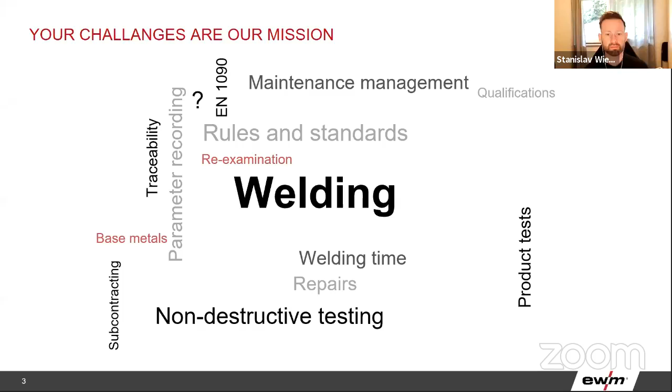And this leads me to the next point, that welding is not that simple anymore like it was 10 or 20 years before. Because if you started to weld 20 years before, you had maybe some documents that you needed to fulfill. You have some norms that you need to fulfill, and you need to document those norms and standards. And if you have done this, then everything is fine. So somebody's ordering a product and you're just welding that product, and then you're just delivering that product. And that's basically it. And I have talked with a lot of managers from productions, and most of them told me the same story.

They said, when we have done the products 10 years before, and most of the industry products, like, for example, heavy industry, like bridges, they haven't changed. The technology of bridges hasn't changed in the last 10 years. So for the last 10 years, we are building the same constructions in bridges. We are welding with the same materials, with the same wires, and mostly with the same welding machines even, because the welding machines are not breaking down. So the machine is even the same that was used 10 years ago.

And that brings me to the point that the work hasn't changed in the last 10 years on bridges, especially in that example. And the end product is mostly the same from the technology, from the materials, from everything that was put inside that product. But what has changed is the quantity of the recordings, of the documentation. And these managers spoke about 8 times more documentation than 10 years before. So that means that you do exactly the same things with exactly the same machines, exactly the same wires and gases. But now the request is that you have to document more and more.

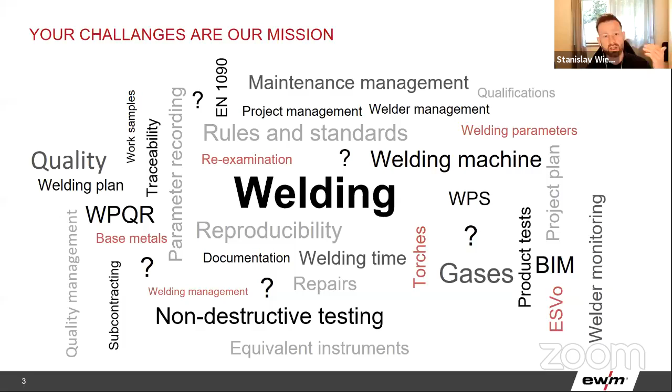And there are a lot of wordings that are now linked to welding. So if you start welding, it's not only welding anymore. With welding, you have a big responsibility. You need to make sure that the welding time is correct, that the documentation is correct. You have WPSs, welding machines, rules and standards, quality, welding plan, and so on. And therefore, we have created a kind of quality circle of welding, if you want. So Welding 4.0 in welding production, we want to summarize it in that slide.

So you have component information that you need to collect. How many welds are inside that component? What kind of weld preparation is inside that component? How many times do we need to weld that component? Then we have the welding equipment. So we need to choose the right welding equipment. In between the welding equipment and the process, we have predictive maintenance. So do we weld until the welding process breaks down because of the torch? Maybe the torch is very old, the torch is damaged, the contact tip is damaged, whatever.

And then the process breaks down and I need to maintain the welding machine before I restart the process. Problem is that I then maybe have an error in my welding because I have just stopped during the welding. So predictive maintenance is a big point.

How can I do predictive maintenance without any tools? Can I say, okay, I will change the contact tips every morning on every torch just to have predictive maintenance? Or is there any simple solution that gives me a light or a noise and says, hey, you have welded now for 10 hours, change the contact tip?

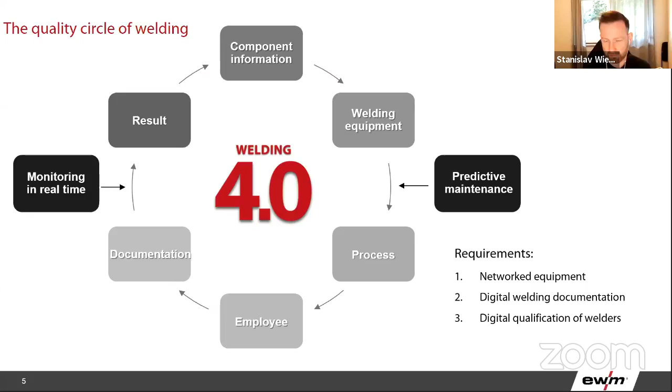And of course, we need to have digital qualification of the welders also. So we have a lot of paperwork to do. And here I'm coming to the benefit of real-time monitoring. So we have just talked about real-time monitoring. How can we do that? And what is the benefit out of it?

Because a lot of people are asking me, hey, why should I record welding data? Why should I record parameters? And what is the reason for that? I can just let them weld. I don't need to record anything. Why should I do that? Because if I record welding parameters, then I'm overwatching my personnel, and they don't want that.

And overwatching the personnel is a thing that we have been doing already for many years. And we are not overwatching personnel to criticize them and to say, okay, your work was bad, or you have welded too few hours in the day, or whatever.

For example, I am in the sales department, and I am tracking my daily work every day. So I'm tracking every meeting. I'm doing protocols of the meeting. My boss knows where I'm going. My boss knows where I am today. And I want him to know what I'm doing, because I want my boss to see how good my work is.

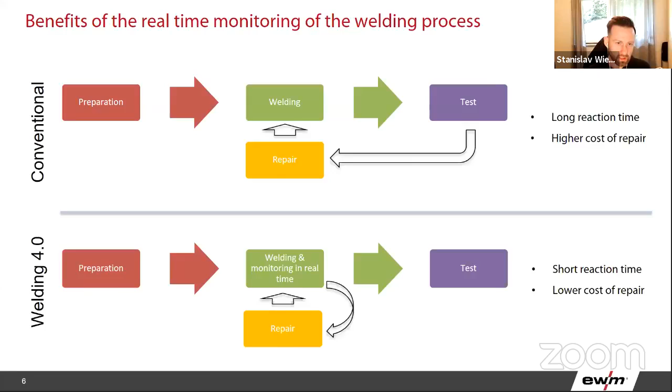And if you look on the side of the predictive maintenance with, for example, contact tips or torches or wire feeding units, in the conventional welding, you have the situation that you weld, then it starts to go down with the quality of the torch, for example, or the contact tip, some working products like the torch, like the wire feeding unit, like the rollers on the wire feeding unit. So it's going down with the quality, and at one point it just is broken.

And then your quality is just going down, because at that point, if you just stop the arc and maybe the wire is sticking inside your molten pool, then you need to repair, you need to grind, you need to cut, you need to change the torch, and so on. So that means that during the time the quality is going down, you're still welding. So your quality on welding is decreasing, and it's decreasing till it collapses. And when it collapsed, then you have to maintain.

So the maintenance is coming very unexpectedly. And then you need time to bring some contact tips, maybe bring some new rolls, cut the wire, maybe the torch is broken, you need a completely new torch, and so on. In Welding 4.0, the idea is that the machine is giving you information about the time you welded already. So you have, again, the possibility to react.

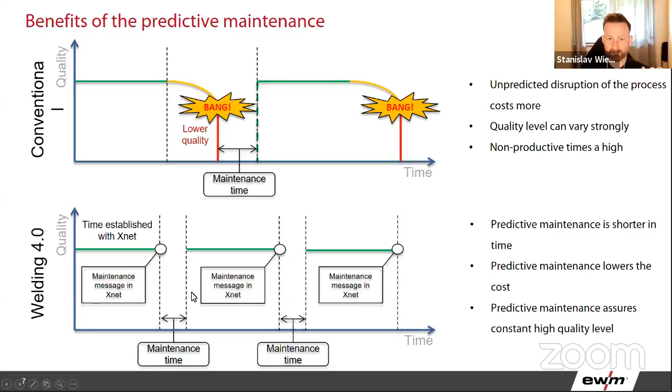It doesn't mean that you need to react or you have to do it every 2 hours or something. The time you can set by yourself. So it's your experience, what is necessary to set a correct timing. And with this correct timing, you can keep your quality on the highest level and shorten your maintenance time. And we need to do it in four simple steps.

And I don't want to scare you, but this was a shocking moment in 2019, where the rooftop on a stadium in the Netherlands was just dropping because of wind. And it was a playing day, so it was a Sunday. Sunday normally we are playing soccer, and the good news was that the organizer of that game said, okay, it's too windy, we cannot play today. It doesn't make any sense, because when we kick the ball, it's just flying around because it's so windy, we cannot play.

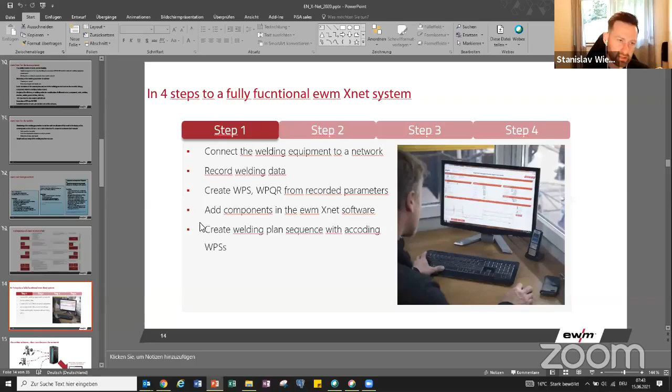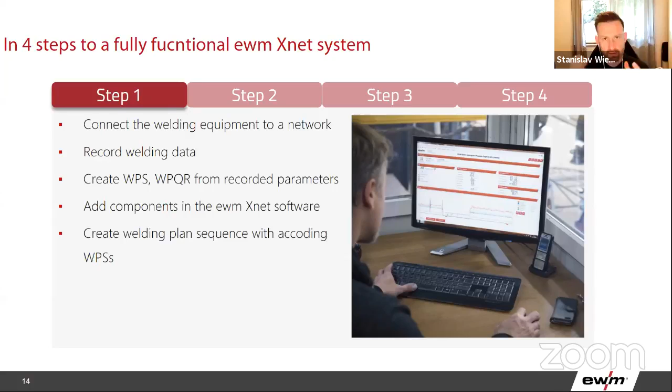So this is a big point for Industry 4.0, or Welding 4.0, to make sure that you are recording your welding data and can link them to a certain project, or can link them to one piece of metal. And it's working very simple. So everybody of you, I think, has a server, and you just need a server to install that kind of product, to install XNet on that server.

And you can link every welding machine from EWM by using Wi-Fi or even Ethernet with a piece of gateway. So it's kind of external gateway that is collecting information from the welding machine and sending it over to the server, and the other way around, if the server is communicating with the welding machine and sending it back to the welding machine. And of course, you can use equipment like an adapter for alien machines.

So if you use not EWM machines, okay, because the main idea of Industry 4.0 is connect everything inside your production, and you don't need to change on one fabricator. Even if I would be happy if you just use EWM, of course, but if you don't use EWM, you can equip your welding equipment or welding machines with an adapter and use them also in XNet. And you can then access, of course, from every browser and every device, iOS, Apple, Windows, whatever.

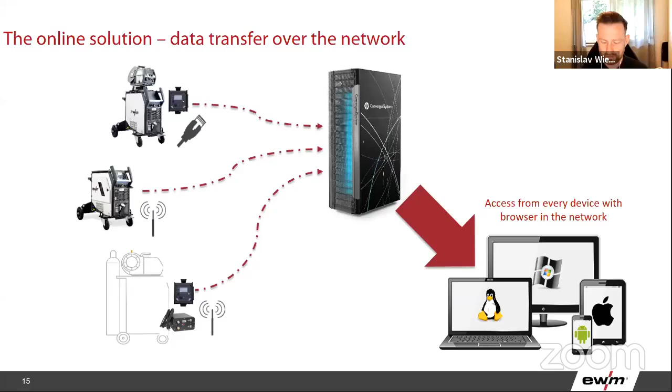Just short question before I go ahead. How much time do I have? Because I know it was 45 minutes or 30 minutes. I'm actually not sure. Sorry for that. But just give me short info. How much time do I have? Or just write it down in the comments, please. Write it down in the comments, and then I just proceed.

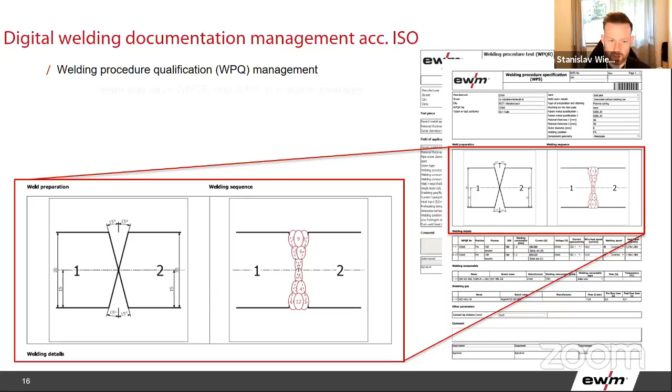Good. What about your WPSs and WPQRs? And for that one, we have created our own WPQR maker with our own welding drawing tool. So you can see that we can do some very decent drawings. I like that tool very well because it's reacting dynamically on your typings. So what you type in here, what kind of plate you have and what kind of material thickness, the drawing will react dynamically, and that gives you a very nice overview what you need to do right now. So you need to create, of course, that kind of documents, like your welding procedures.

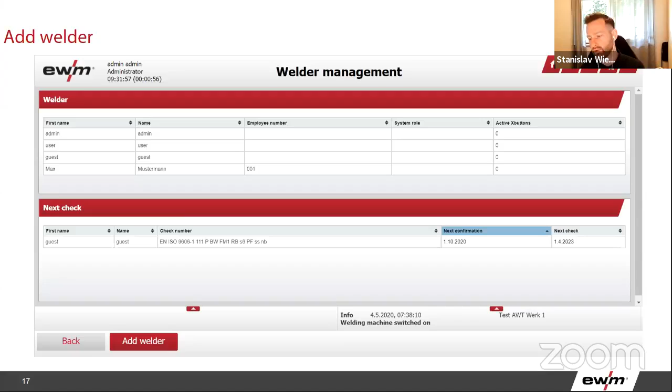Of course, you need to do the same thing with the welders. So put the certificates inside the system, because we have here welder management. The welder management gives you the possibility to print a welder certificate, or to sign the welder certificate inside the system. So the complete prolongation tool is inside Xnet. You don't need to make the signatures on the real paper anymore. You can do it inside the digital system.

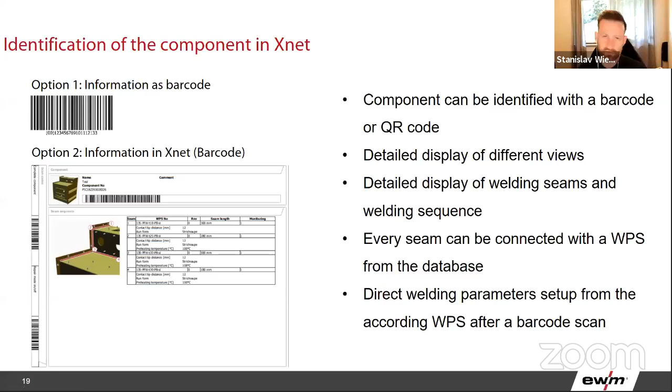So step 2 basically is to put your component inside Xnet. So like this little piece, you see, this is a kind of component. I don't know what this is. The customer is welding that kind of stuff. I think it is actually an oven for your kitchen, where you can just cook your things. So even this needs to be documented, and they have linked all the WPSs to all the different seams. So you have a detailed display of all the different views, and you can see all the welding seams which need to be created. You have barcodes on that, so that you can scan it from screen, or you can scan it from paper, whatever you prefer.

And step 3 is to identify the welder with the Xbutton. So we have here a small kind of chip reading device, and you can put the certificates and the name of the welder on the chip, and then he or she can register on the welding machine and link the name to that product.

You can say, okay, I was the welder of that product, and you don't need to do it by hand with a pencil or something. I have seen productions where they have a big drawing of the product, and every welder got his own color. For example, yellow, green, red, blue, whatever. And then they were drawing on that drawing in color what they have done.

So in yellow, I have done this weld and this weld and this and this, and then blue and green. So you have a big drawing with, I don't know, 10 different colors inside that. So it was like a book in the kindergarten where they just draw something in color. So from my point of view, sorry to say, absolutely ridiculous to use that kind of documentation. Who was the welder?

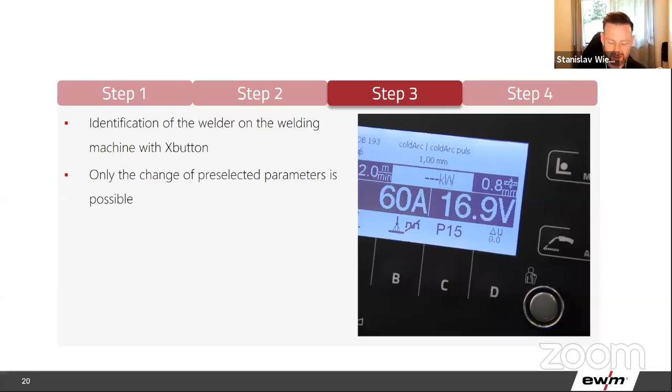So you can do it very simple, like linking it to the welding machine, and then you know what kind of welds you have done. And then you can display all that kind of stuff on your torch. So even if you then use the EWM torches, of course, it's not necessary to use EWM torches, because you can do everything with your scanner.

But the benefit of using the welding torch is that even the torch is showing you the information you need to know. So you can see it's now seam number 4, and it's run number 1 of that seam. And you can confirm through the torch that you have welded, and then the machine is jumping to the next WPS and changing the parameters on the welding machine.

So yes, if you use EWM equipment, then you can link the WPS to that component. And by scanning the component, the welding machine is setting up the parameters just right in that WPS. And this is a big benefit. If you, for example, use alien machines from other manufacturers, then of course, Xnet cannot tell them to set up the parameters. So you can record everything, but you cannot communicate from the server side to the welding machine. So the welding machine stays open for everyone.

Okay, with EWM equipment, you can kind of lock it, or bring it in a direction where they need to go. So you give them a feeling about the parameters, how much wire feed speed and voltage correction you need to set up, because the WPS is giving you a range.

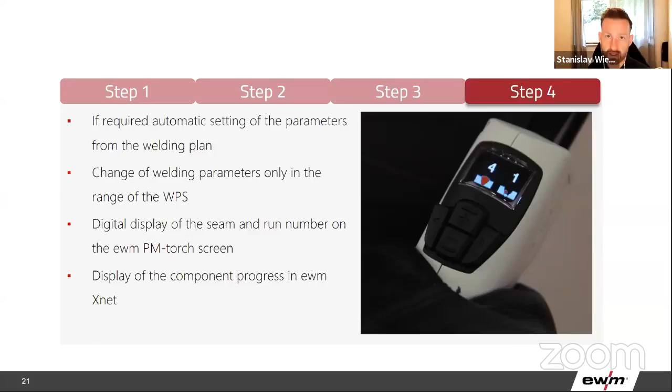Oh yeah, let's quickly jump over this slide. So this is just for understanding how the process can work. So you scan the barcode for the order number, batch, component group. So you can scan a lot of things. It depends on what kind of info you want to collect. Then you log in on the welding machine so that you have also the welder information. So you have the component identification with all that kind of info, and welder identification.

Then you do the welding. So manual setup or automatic setup. Automatic setup, like I said, is when you scan the component and the WPS is linked to it, then the machine can set up the parameters, but you can do it also manually. Then you have the real-time monitoring. So you have always a link to that component. You can always have a look at the parameters live.

And after that, you have statistics in Xnet, or you can export everything to BI tools. BI tools you can download free of charge. I think Power BI is a free of charge tool to make some links to a certain database, and then make your own graphs, your own statistics, whatever. Export it to a CSV file, for example, WPS, welder certificates, whatever.

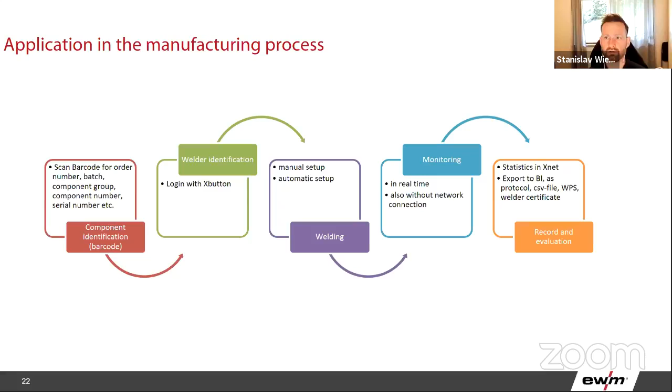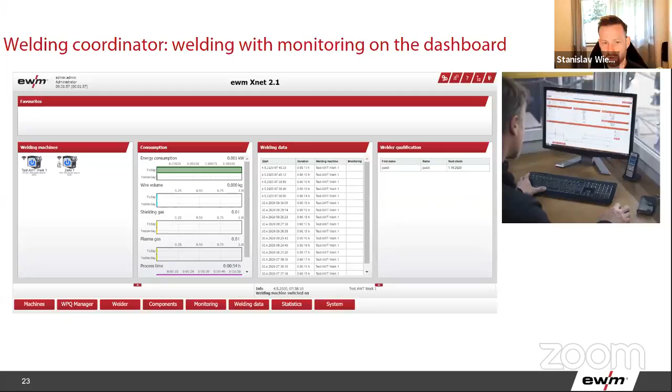So you have a result, you have an insight into your production, you have an insight in your order, and you always know which step we are on right now. So for the welding coordinators, you have the monitoring and the dashboard, so you can see from one view what is the consumption, welding data, whatever.

The motor current is a value that gives you a feeling about the state of your torch. Because if the motor current of your wire feeding system is increasing, that means that the motor is pushing the wire very hard. And if that's the case, then you know that your torch is dirty, broken, or just used. And this can be an indicator for you. So if the motor current is increasing more than, I would say, 1.5, 1.8 amps, then I would have a look on my torch.

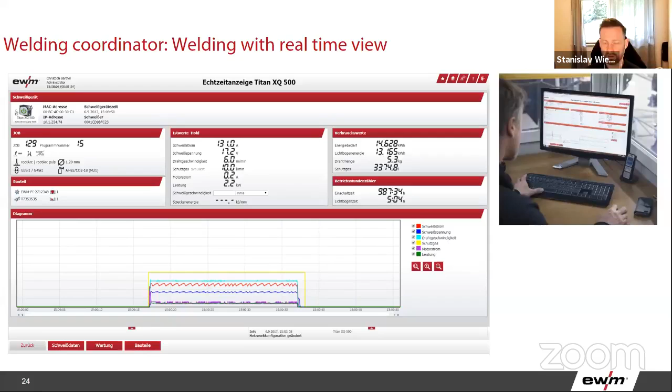So I don't want to monitor my whole production. I just want to monitor very, very sensitive welds. When I know, okay, these are safety welds. Maybe if there's something broken, then people can be damaged. Yeah, so human life can be damaged. And then I need to record that. I need to monitor that. And you see here, this is not monitored. So I assume that this was not for safety reasons, no safety seams.

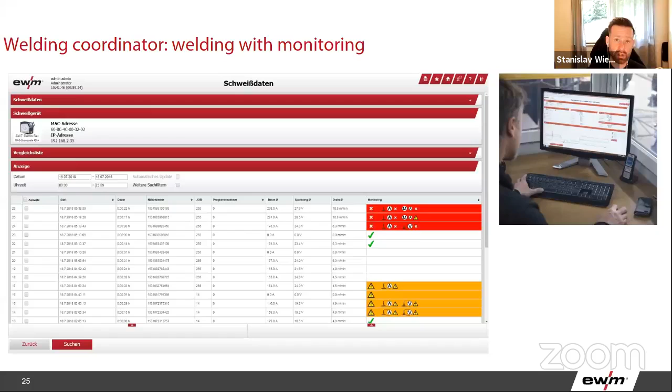These were okay. Here we have 4 warnings. We got 4 warnings, one in amp voltage, but it's just a warning, okay? So I have set the parameters by myself. Me as a welding coordinator, I can set up my parameters and can say, you give me a warning if you exceed whatever, 20%. You give me a failure if you exceed 30%. So you see, this is a potential error. This is a warning, just to have a feeling about that.

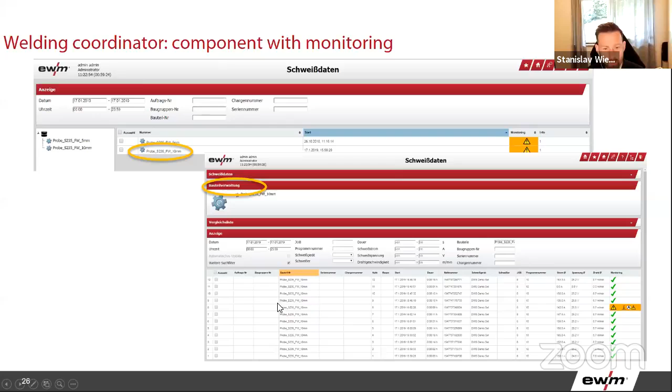We have a project. For example, this was now the component number, and we have the component number even here. So, okay, it's just pointing there, but it should point here. And here's the same. So if I then just choose a weld from that component, then I can take a closer look to my component, and I see this was the component blah, blah, blah, and the seam number 8. So I can see the seam number 8. And this was the welding on seam number 8. Looks quite okay till here.

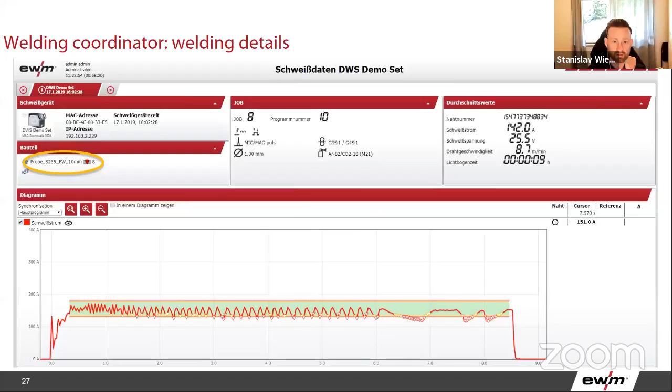So maybe, I don't know what happened here. The arc was a bit too long maybe. So it was just jumping down and up again. I don't know what the reason was here. So it was MIG/MAG pulse. You can see with a 1.0 millimeter wire, and now we can do some investigation. And just give me a short 1 minute, and then we can do our wrap up.

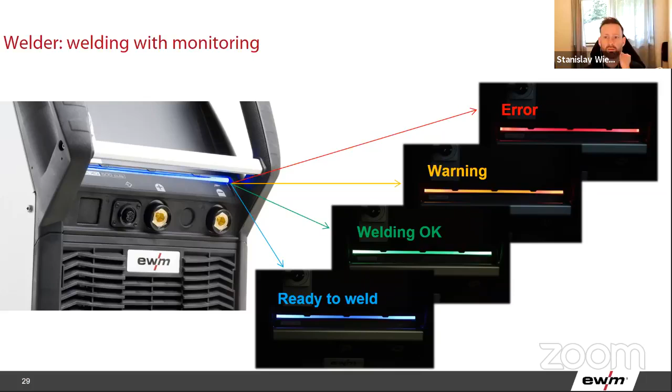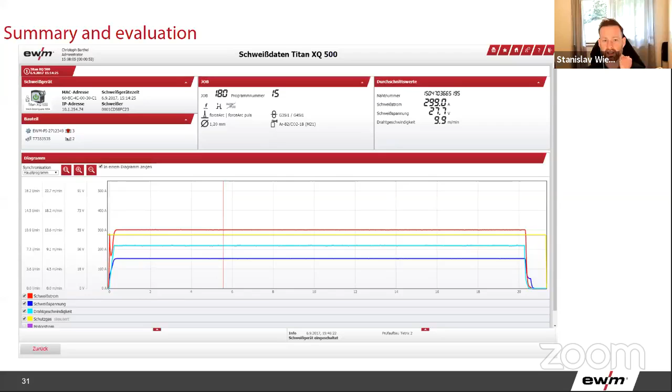Let's have a look on that. So this is a kind of report then. And also the welding machine gives you an indicator. So it's not only for the welding coordinators, also the welders can get a warning on a light, on an LED. And this is a maintenance overview, so you can set up your timers, what we have spoken about already before all the time. And this is again a summary evaluation about that kind of stuff, so you can see your efficiency.

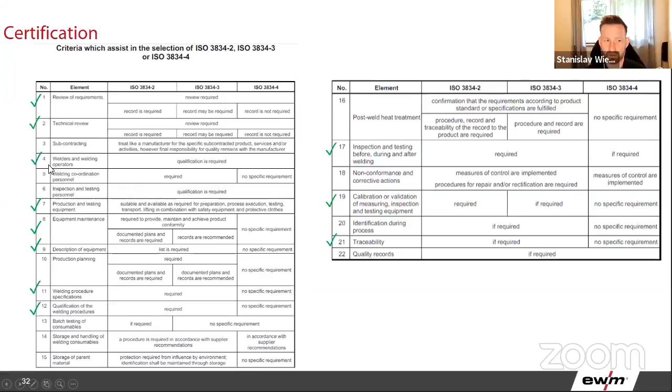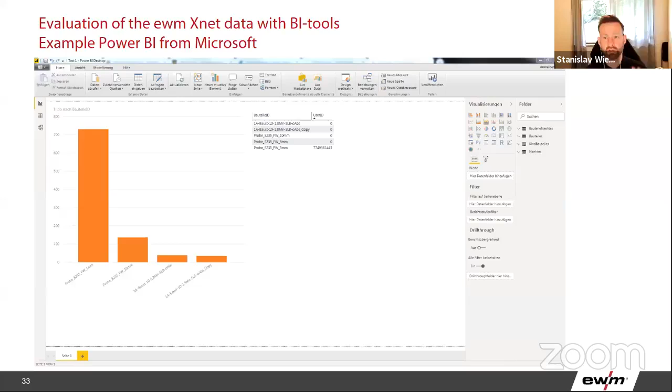And this is a slide, but you can see them by yourself. I don't want to show you or read all that stuff with you, but this is just the norm or the standard that we fulfill or that we support with XNet. And this is an example if you export all that stuff to Power BI from Microsoft or whatever, so you can build up your own graphs, graphics, sketches, whatever. So this is kind of overview.